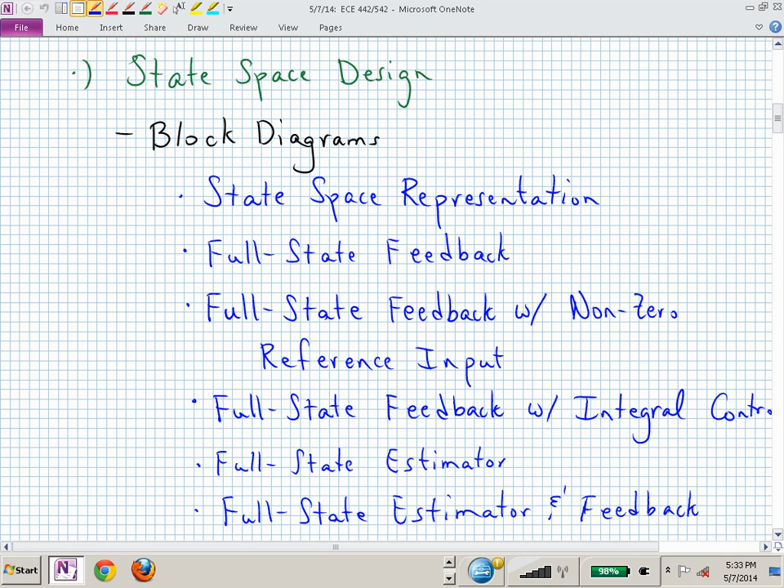Today, a picture is worth how many words? 5? I know this is a discrete class, but 5 is a little low. Don't they say 1,000? A picture is worth 1,000 words. I'm going to give you many thousands of words in the first part of the lecture.

All of these blue dots are going to be pictures. I want to play on your visual conception of what we're talking about when we talk about state space design. We'll look at state space design first by reminding ourselves what the state space representation looks like as a block diagram, and then we'll start building on top of that. If you like to build things, if you're a hands-on person, now is the chance to draw those builds in the state space design approach.

We'll look at state space feedback, and full state feedback with non-zero reference input. That's all on homework 8. Then we will move into integral control, which connects this PID control concept, or at least the integral part of the PID, to state space design approaches.

And why do we like integral control? Just as a question for your final conceptual understanding, what's so good, or why do we like integral control? Or do we like integral control?

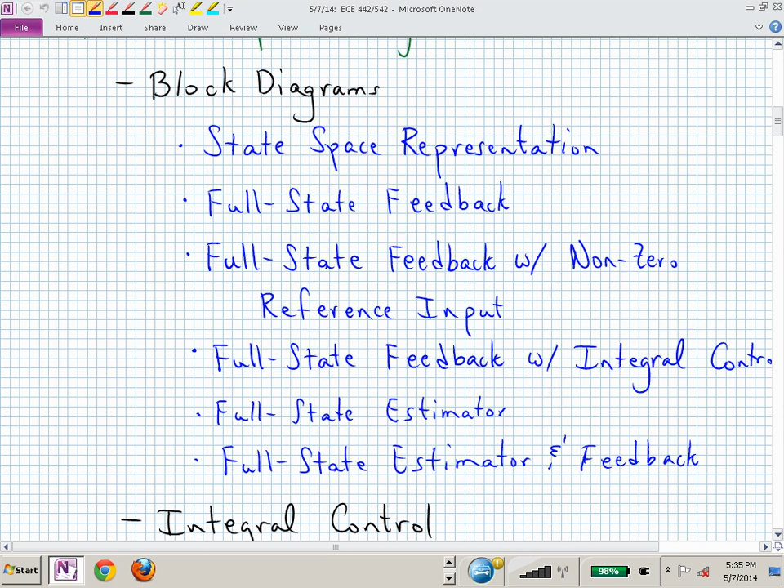It helps us with our steady state error or our steady state accuracy. But it does possibly have to be traded off with transient performance, because it now puts another pole right on the stability boundary, and that may negatively impact our transient performance. So we always have to keep that in mind when we're dealing with integral control.

All of those topics have assumed that we have access to every one of the state variables in our state vector. If we had 10 components in our state vector, then we're assuming we can measure all 10 of those. Maybe it's 2 positions, a couple of voltages, some currents, some temperatures. All of those are, let's say, state variable components.

We're assuming we have access to those in this state variable design approach, until the last two. Now we're saying, well, if we don't have access to those, is there some workaround? And the workaround is to actually build an estimator. This is getting us towards something called a Kalman filter. Have you ever heard of a Kalman filter? If you haven't, then if somebody starts talking about a Kalman filter, you'll go, I've heard about that, I kind of understand what might be happening. We won't talk about a Kalman filter per se, but it will get us there, or start to get us in that direction.

So when I was your age... well, I won't tell stories.

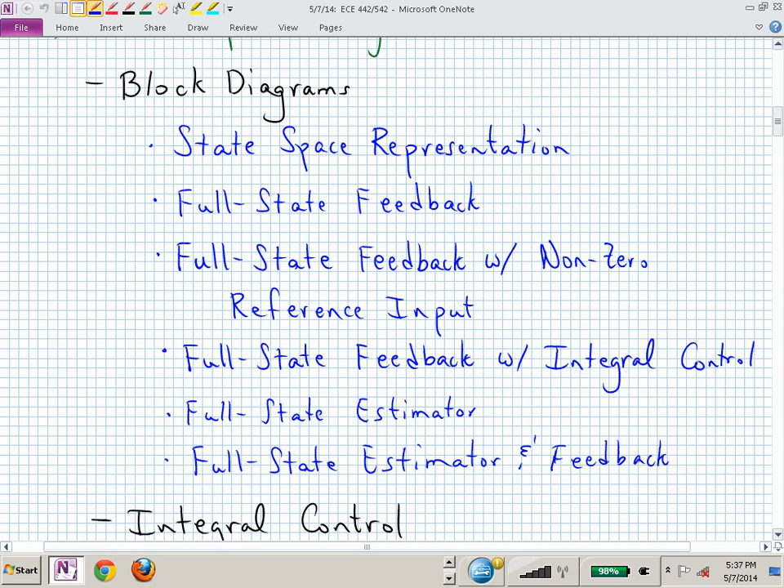We'll look at how, now that we've built this estimator that estimates all state variables, all 10 components of our state vector, maybe from just one measurement, we'll use that instead of the actual state vector, since we don't have access to it. We'll feed back those estimated states—that's the last bulleted item in blue underneath our block diagrams.

With respect to integral control, we will derive the augmented system matrices. That concept of augmenting some dynamics with others is a very powerful concept, and if you can understand it for integral control, it will make sense in other scenarios.

Once we've built this system—and we'll build it directly from the block diagram, that's the importance of the block diagram—we'll discuss how to identify the integrator gain and how to pull off the state vector feedback gain from the augmented set of matrices. Augmented just means we're adding on to the original system dynamics, building up our system matrix and input matrix, increasing their dimensions.

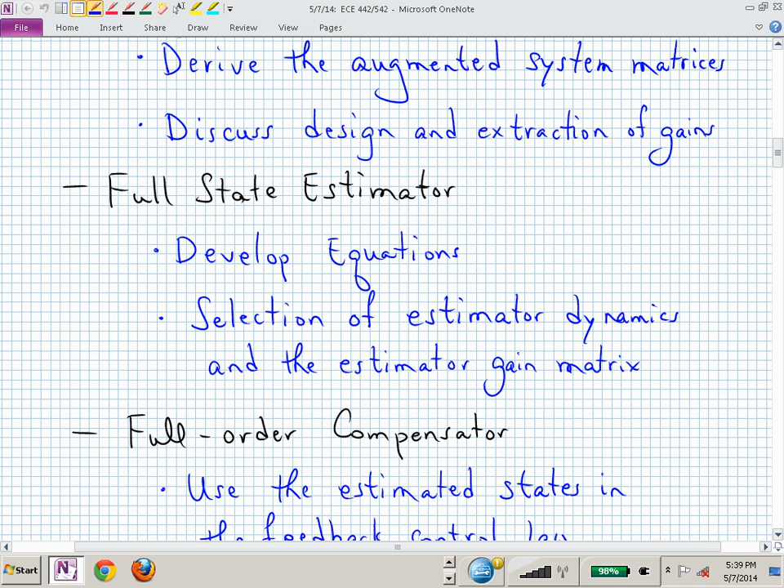We actually want the estimator to converge quicker than our system dynamics. Meaning, if we're applying an estimated position value as if it were the actual position, and it's having a hard time keeping up with the actual position, we're out of luck. So we want our estimated values to converge quickly to where we want them, and then it makes sense to use those as if they are the actual variables. That's the idea.

Then we talk about using the full state feedback gain matrix we've learned to design, with the estimated states. Putting that together gives us a way to design controllers by simply turning the crank—we don't have to scratch our heads about where to put poles and zeros with root locus, when it's not working for us. In the state space approach, we can pick closed loop pole locations, find our K, then go up the alphabet and find an L for our estimator gain, and put it all together to get a compensator.

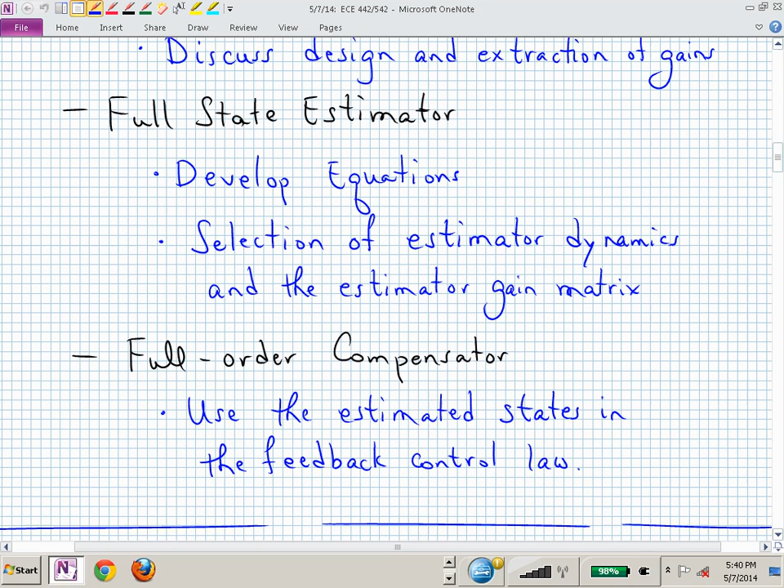That will work, and maybe it will give us ideas or hints as to how we might go back and build a generic or general controller in the Z-plane approach that could be of lower dimension than this estimator-based one.

Final exam info—I'll go through this quickly. It's comprehensive. There will be 15 questions distributed across the entire semester. But since the last material is sort of cumulative, I could give one problem with several parts, which might reduce my grading.

Meaning, if you don't even know how to start, there's 5 questions I don't have to grade. But the later material does depend on earlier material, so in that sense it might look weighted toward the end, but that's because you're using all the foundational material from before. The idea is that it will be distributed across the entire semester, and I've put together a topic list for the final exam, but that only includes material since exam number 3.

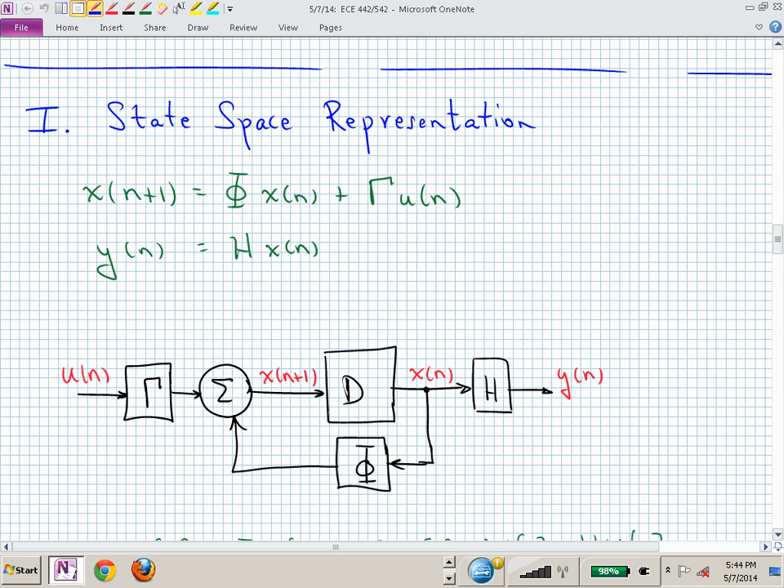But this is now the picture, and you should be able to, from this picture, write down this set of dynamic equations and the output equation. You should be able to go from this state space representation into a block diagram by simply connecting up summing junctions, matrix blocks for gains, and the delay block that processes or delays each of those state vector components. That's the state space representation.

And this should just be review — you can now z-transform the state space. If you're looking to find the transfer function, you don't need to worry about initial conditions, and you can find the transfer function g of z from that set of difference equations represented by your state space representation.

What are we doing in a real world setting? Yes, this is a regulator. We're really only worried about damping out initial conditions or disturbances in our state vector. We're not really saying we're interested in commanding our output to go somewhere — we're probably trying to regulate that y to 0. It's a regulation problem, and we're able to regulate it by shaping the dynamics.

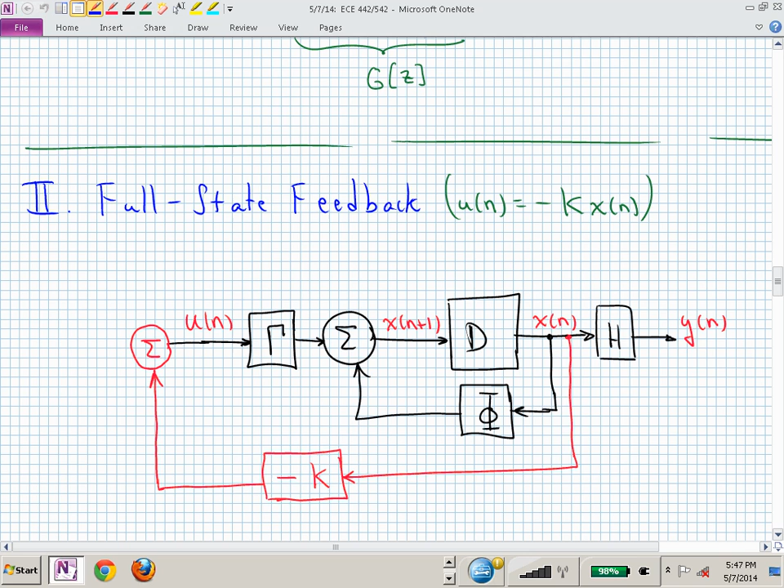And when I say shaping the dynamics, you should be thinking closed loop what? Closed loop eigenvalues of your closed loop system matrix, which is phi sub c. Some of you came up after class and said, didn't you forget some c subscripts? And I did — so in the video they're not there, but after class I added those in during the latter part of that discussion. I was just getting quick and writing phi, but it really should have been capital Phi sub c, the closed loop system matrix, which in this case is phi minus gamma k. That's the closed loop system matrix, if you combine all of those together.

So that if you inject a reference signal of 1 meter, your output goes to 1 meter. It doesn't go to 25 meters. You've adjusted this N1 to make that adjustment happen automatically.

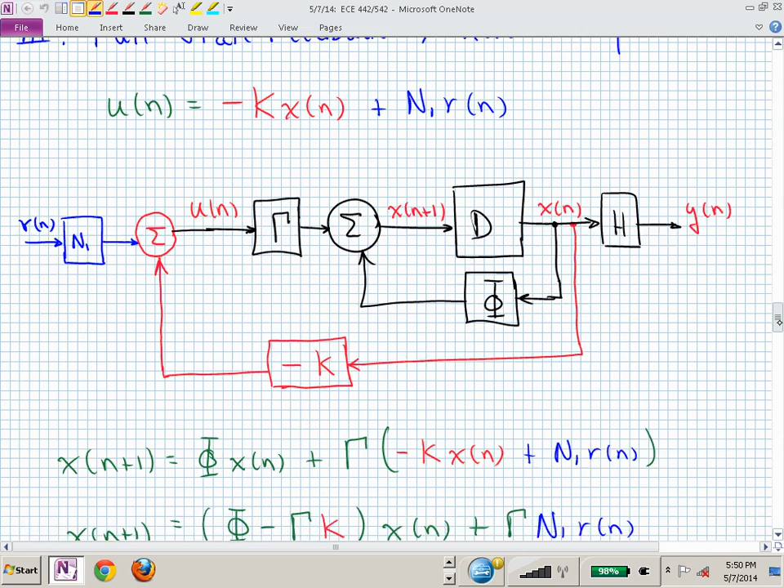So you're sitting here going, what? If you go back to yesterday's class when we had a second order system, then you would know that you have two state variable components. And if we're told that the input, we only have one input, that's going to tell us what K is dimensionally. K is trying to transfer the state vector into the input, linearly combining our state vector. So if we have two state components in our x of n vector, position and velocity, and we only have one input, then K is going to be a 1 by 2 matrix, a row vector.

What's n sub 1 if we have one input? It's a matrix, but it could be a 1 by 1 matrix, which you think of as a scalar. And that's typically what we will be using in this class.

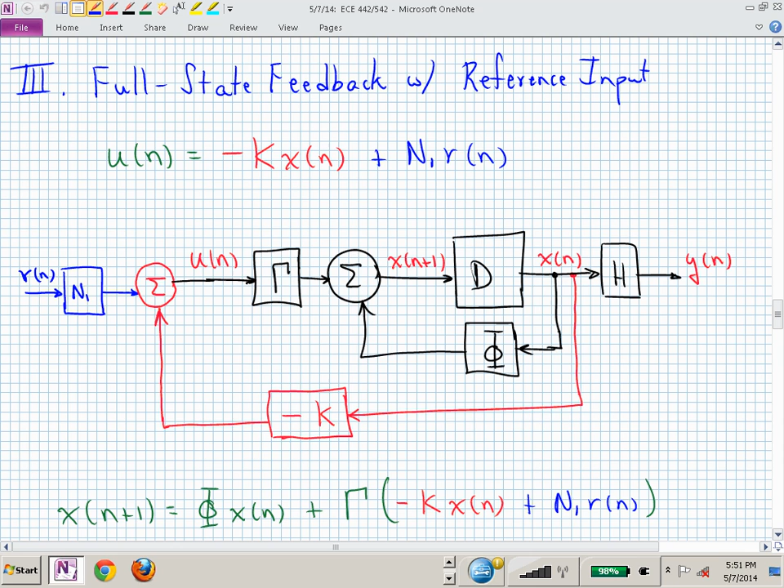Now applying that U of n, you could also find the dimension of K by saying, wait a minute, gamma K, that product better be compatible dimensionally with phi. Phi was our system matrix, that's 2 by 2. And if gamma was 2 by 1, then we need to multiply gamma by a 1 by 2 to expand that product to be a 2 by 2 matrix so that it's compatible with phi.

Another way of thinking about phi, we could call that phi sub c, and this is what you're using in homework number 1 or number 8. You're looking at this transfer function T sub c of z and adjusting n sub 1 to typically create a DC gain between the reference input and the output of 1. And if we have a single input, single output system, that H, we're replacing Z with 1 because we're interested in the DC behavior.

I minus phi sub c inverse, gamma, that's simply going to all collapse down into one number, a scalar, a 1 by 1 matrix, and that we can divide underneath. We don't have to worry about matrix inversion for a single input, single output. Questions on this?

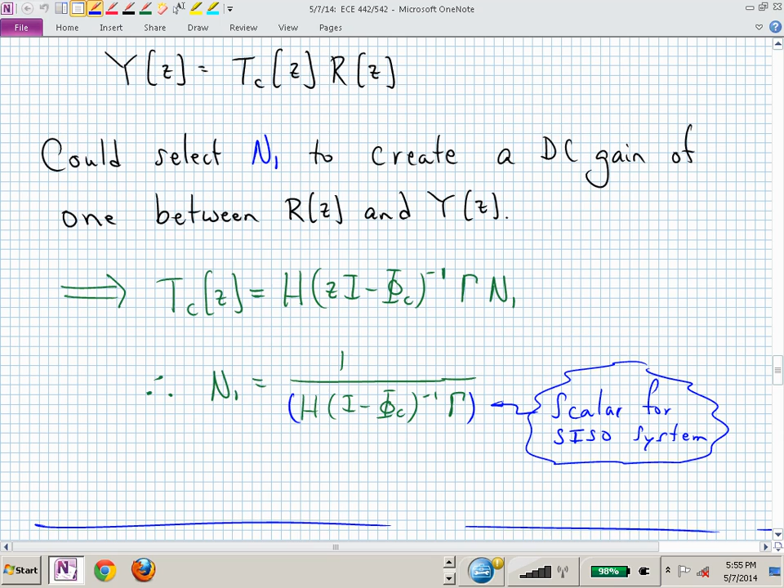Uh-oh. Wow. All right, bear with me, let's see if I can.

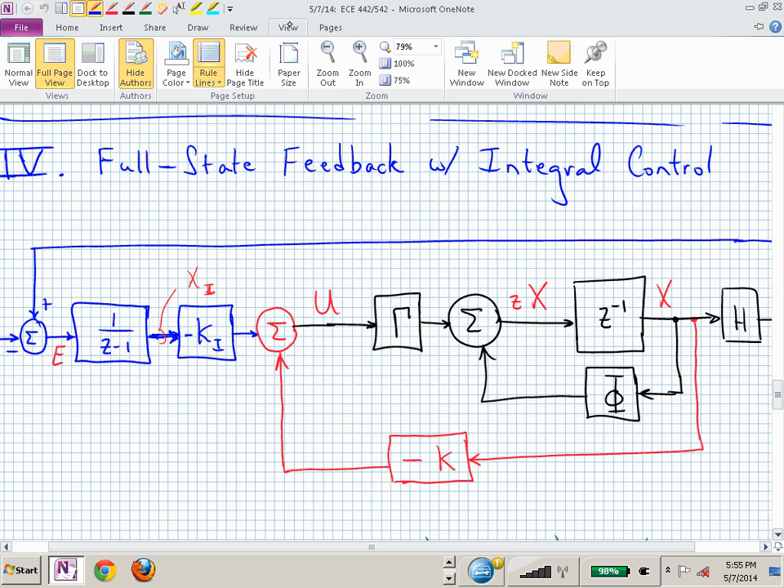Now we're adding integral control because maybe we don't know all of the elements in phi accurately enough, or the elements in gamma accurately enough. Gamma is how we inject information into our system.

And we liked integral control because that allowed us to drive our error to 0 if the whole system is stable. If we can guarantee the whole system is stable, then that error signal is going to be driven to 0. If our error signal is 0, what does that tell us about our output?

It matches the input, doesn't it? And notice how I've labeled this. Maybe that's a little different than what we have, but I needed to do that because I'm introducing a negative sign inside here to be consistent with the negative here in the full state feedback, so I didn't want a double negative on my output as it's coming through the system.

This is simply an integrator block, this 1 over z minus 1. K sub I, the I is for integral, that's our integrator gain, and that's just a scalar. K is whatever dimension it needs to be to manipulate the state vector into the input.

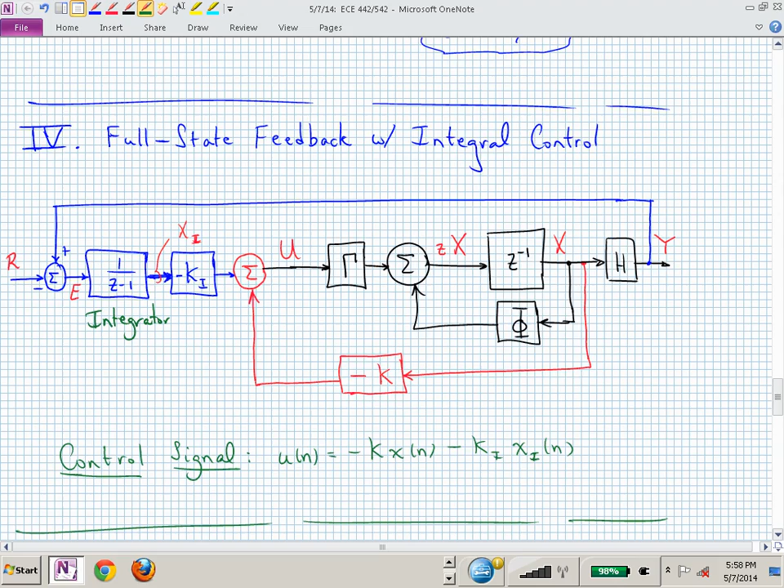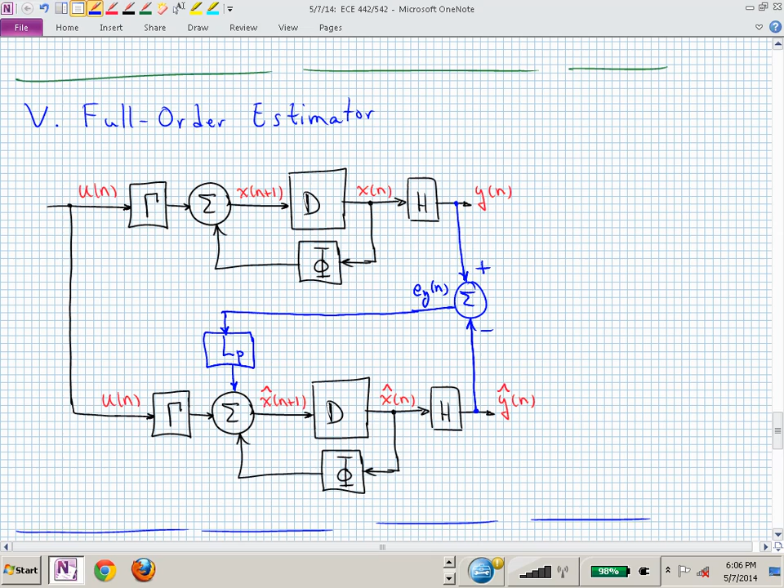We've talked about a system being controllable. This one would need to be observable. It's a dual concept, meaning you need to be able to see all of your state vector's components through the output y. And then you can use L sub p to adjust the dynamics at will. That's the idea.

Here's the same thing as before, almost. Now we're going to simply—I need to put some party hats on these, don't I? Because we know these aren't the same. Even though our phis and h's and gammas may be identical, they may not be the same because maybe our system actually started at a different location than our estimated version did.

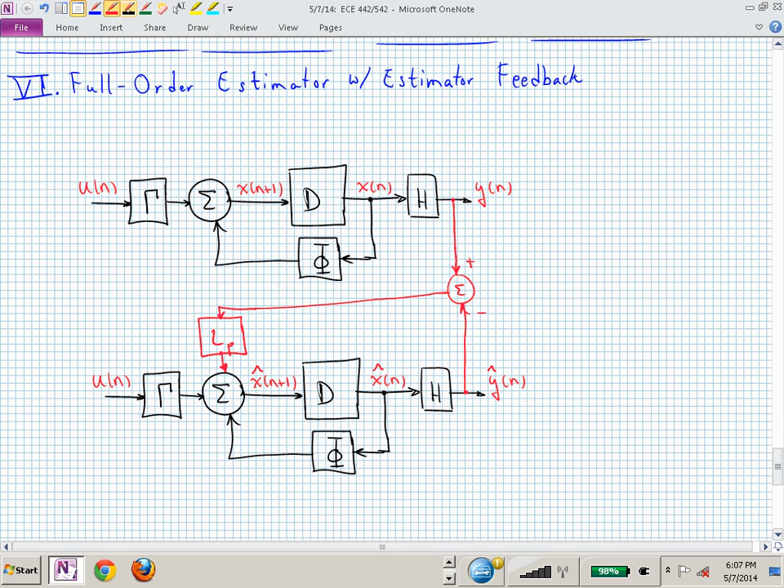We'll use that error signal, but now to control this, what we're going to do is measure, or have access to, x hat. We'll scale that with our full state feedback gain matrix that we've been using all along, and that will now drive not only our estimator but also our true system. The combination will control this true system in a way that we want it to behave. That's the idea.

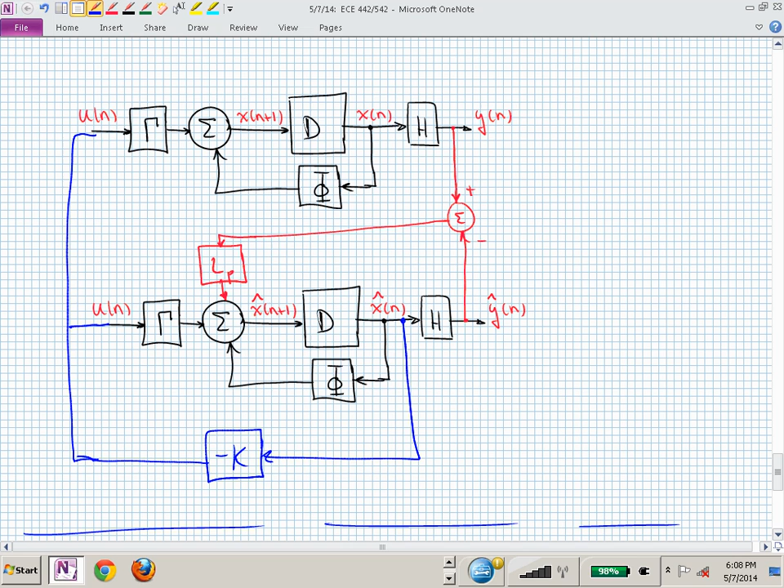All right, now let's quit looking at the picture book. Whoops, went the wrong direction.

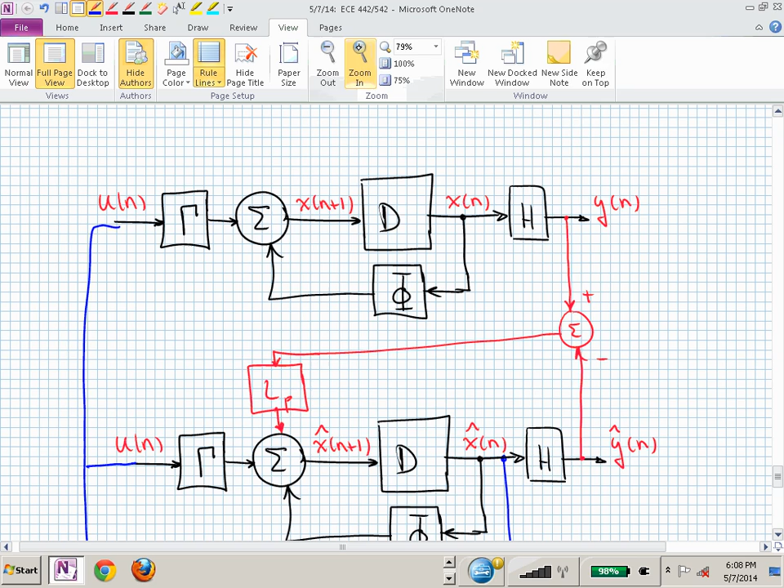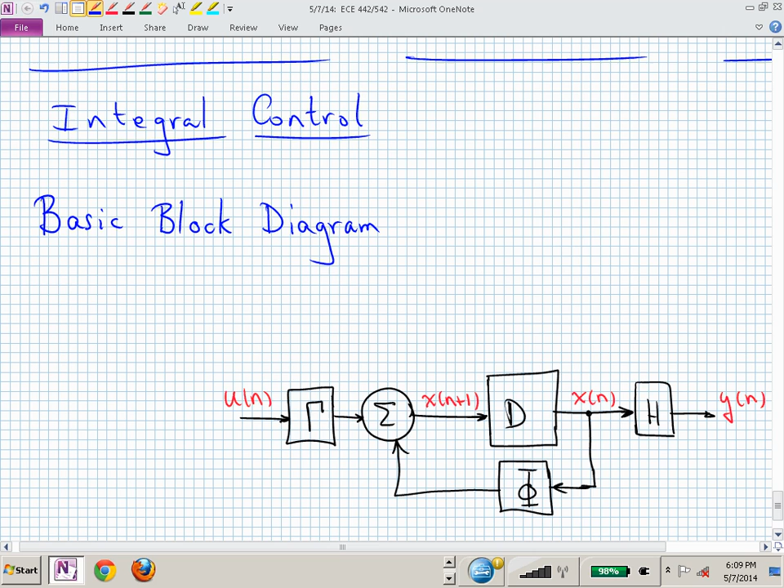And let's talk about integral control. Maybe I didn't go the wrong direction. Here's integral control. Not quite, is it? Right now I have just the original system dynamics, and we want to introduce an integrator into this.

An integrator is trying to integrate away the error between our output signal y and our reference signal r. So now, and maybe I don't really like this because I'm going to be mixing time domain and frequency domain, so I'm going to get rid of the time domain arguments here, and say that this is now z times x, and this is x. Let's say this is y and u, but in the transform domain.

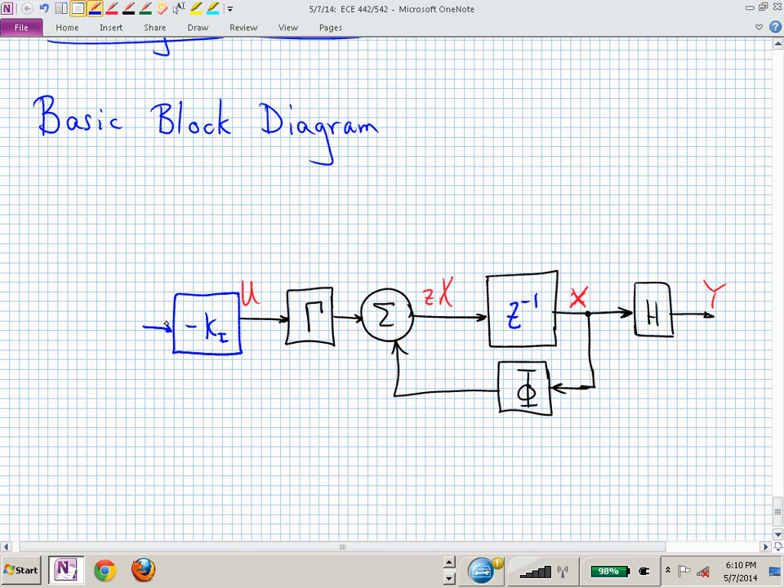I want that to be a bank of delays in the transform domain, because I want to build up my integrator in the frequency domain, or in the z domain. 1 over z minus 1 is an integrator. That's going to be my u. I knew I was running out of space, so I'm going to have to squeeze something in here.

There's our u. That's supposed to be a summing junction, and what we're going to do now is go back to assuming we have access to the full state. We're going to scale that, and this may not be the same k, so I'm going to give it a hat like before. This will go here, but that's not going to give us all that we wanted, because maybe we have inaccuracies in what phi actually is, or what gamma actually is.

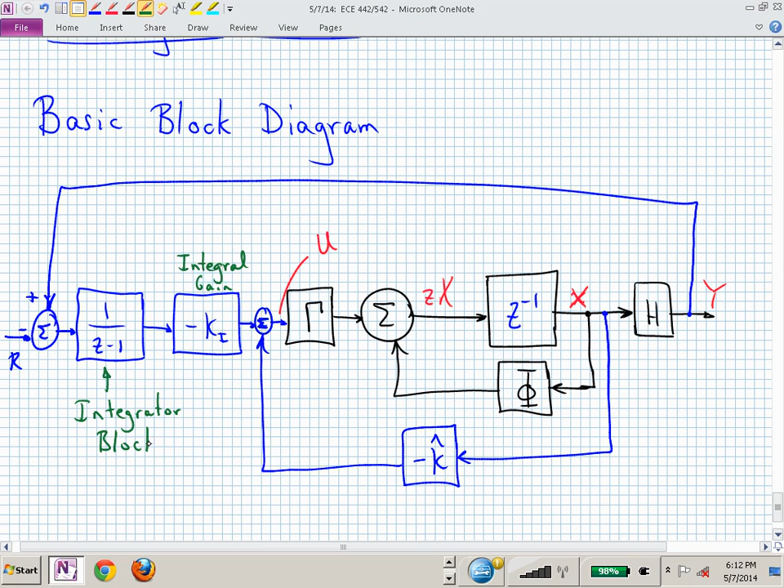For that reason, we want to compare the reference signal with a negative sign with our output with a positive sign. This is our integral gain, and this is our integrator block. And this is our full state feedback gain matrix.

What we want to do is figure out how to model this, and if we can model it, can we create a strategy for figuring out how to pick k hat and k sub I. But is this block diagram okay? Do you see, or do you have a feel for what's going on here? That's what I hope you're starting to do in this class. At this point, I hope the block diagram just screams at you, oh, that's just my state space representation, my dynamics, and my output equation.

Yes? So if your integral gain was not 1, would you need to scale your output from that gain as 1 over your integral gain? So your integral gain, k sub I, we don't know what that's going to be. But we are making our output path be unity, meaning we're comparing the output y to the reference r. We're not scaling the output y when we're comparing it to our reference.

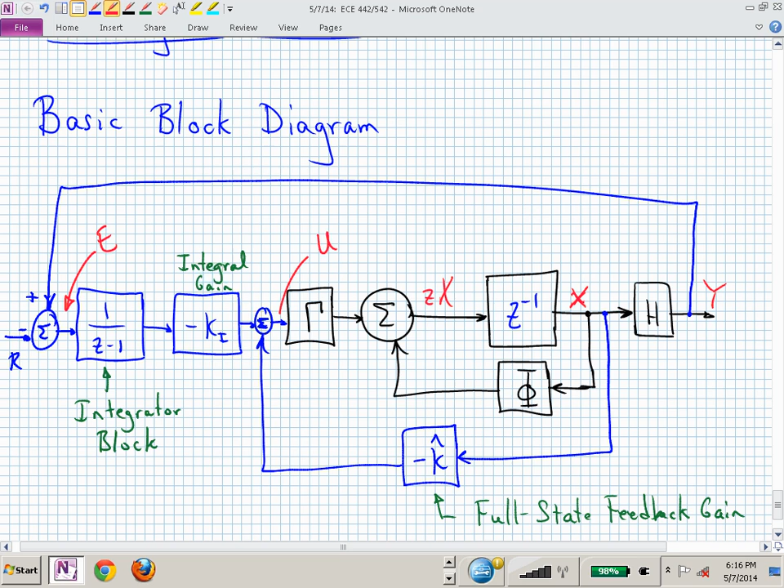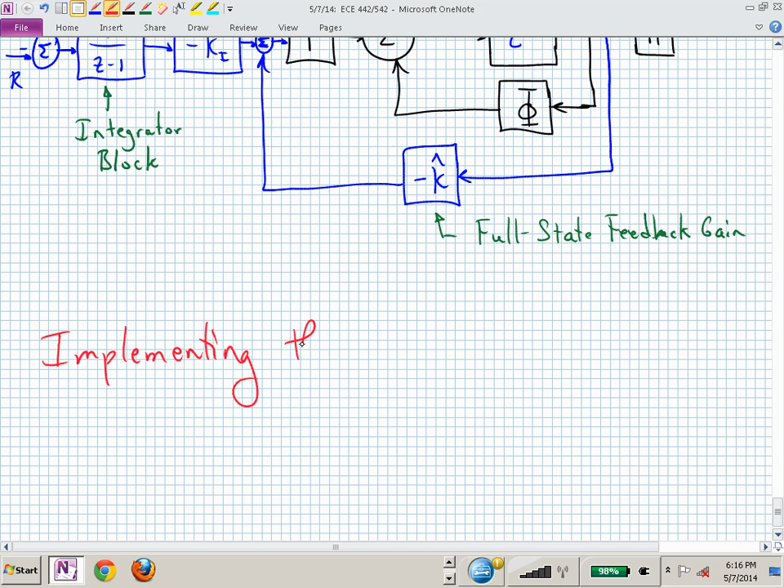What we want to do now is, let's just say we are going to do an implementation of this integral control structure.

Or another way of finding that is we're finding Elmo. Oh, I'm not Elmo. Who do you find? Waldo. Finding Waldo. Who's Elmo? Nemo, wasn't it? I don't know, I don't go to movies. I don't watch movies, obviously. So now it's finding Waldo, or where's Waldo? It's finding Nemo, isn't it? All right, where's Waldo? I don't know where Waldo is. We don't need to worry about Waldo.

We need to find k sub I and k hat. That's what I want to be able to do.

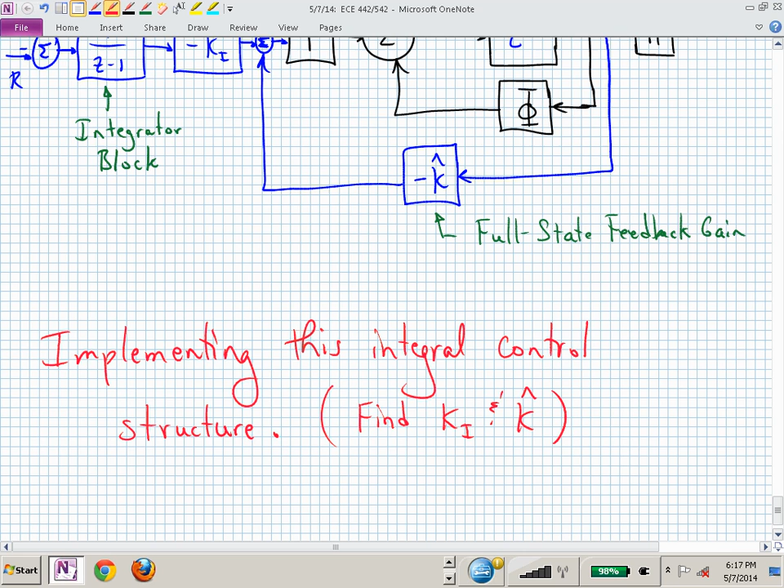Let's start with trying to figure out what's going on here. Let's say this signal is x sub I, the state vector component that's the output of that integrator block, and the input to that integrator block is E. This is just a final exam review problem, as easy as it gets.

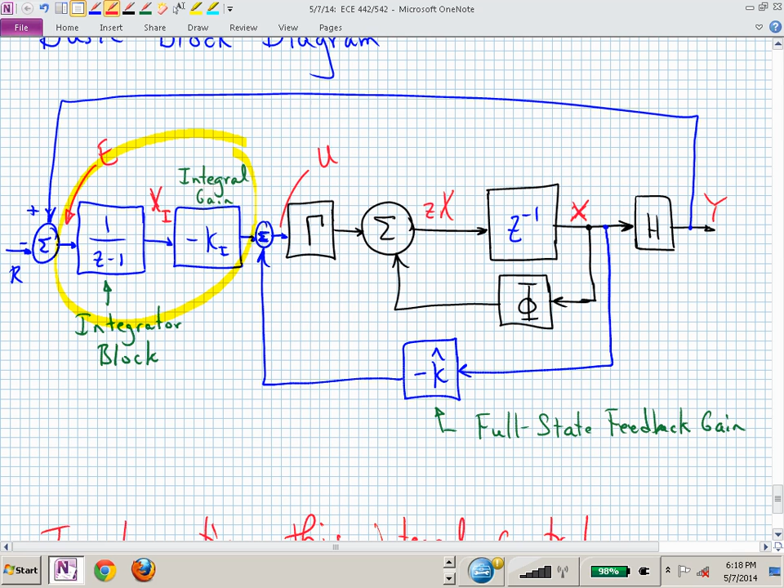So let's now look at the dynamics of what we've just drawn via a block diagram. This is prime material for sketching on napkins. If you're in an interview and somebody says, what did you do in class tonight? You can say, I was designing integral controllers. Can you explain that to me? Sure, where's a napkin? So you pull out a napkin and start writing down the dynamics, and you impress your interviewer. Let's look at the dynamics, and in particular the integral term.

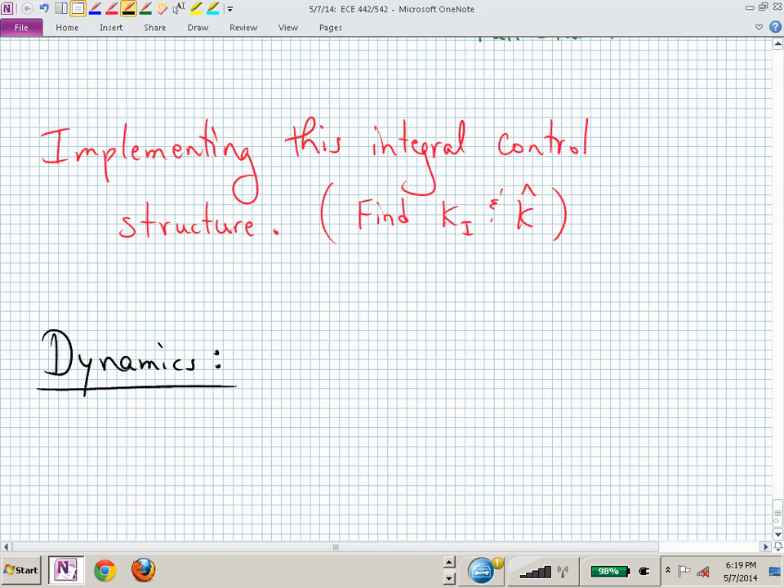This helps you review for the final exam, which is Friday. That's our commercial. The exam is Friday at 6, right? If you come here 48 hours from now, you're going to miss 20 minutes of your exam. Don't do that, because it's a long exam. So get plenty of rest between now and then, but not so much that you sleep through the final.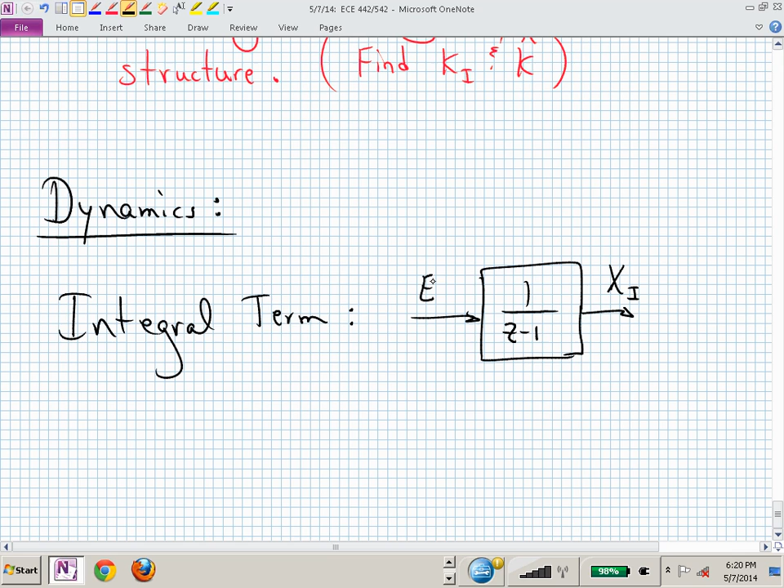1 over z minus 1, that's the block, that's the integrator block. Here's the output, x sub I, and here's the input, E. Now if I said derive the difference equation associated with that, you better be able to do it on the exam, right? Probably won't get any easier than this on the final.

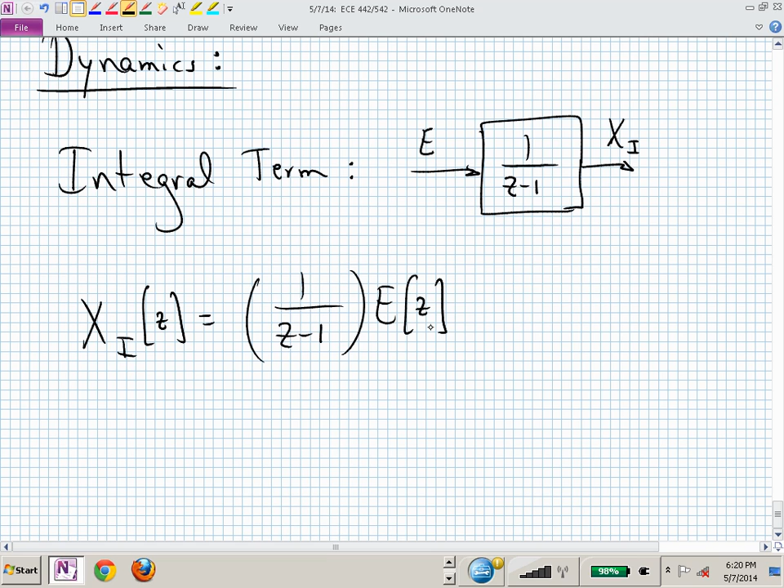So you get that picture and you say, that's x sub I in the z domain. That's the output, and that's equal to 1 over z minus 1 times e of z. See, this is so easy, you're yawning. Or I start talking about sleep, and I've lost half of my audience. I'd already lost the first half. Now I'm all alone. I can do whatever I want, can't I? You guys won't be any wiser, especially those at home.

Now what do I want? A difference equation, because I want to augment my earlier dynamics, which are x of n plus 1 equal phi x of n plus gamma u of n. I want to augment that with what this produces. So what's the difference equation look like for this? Let me just cross multiply, and I have z minus 1 x sub I of z is equal to e of z. That should be straightforward.

Now I have z x sub I of z minus x sub I of z equaling e of z. Shouldn't be any questions with that. Are there any questions with that? That should be clear. You should be comfortable with that. If you're not, please get comfortable with that because it's not going to get any easier than that for the final.

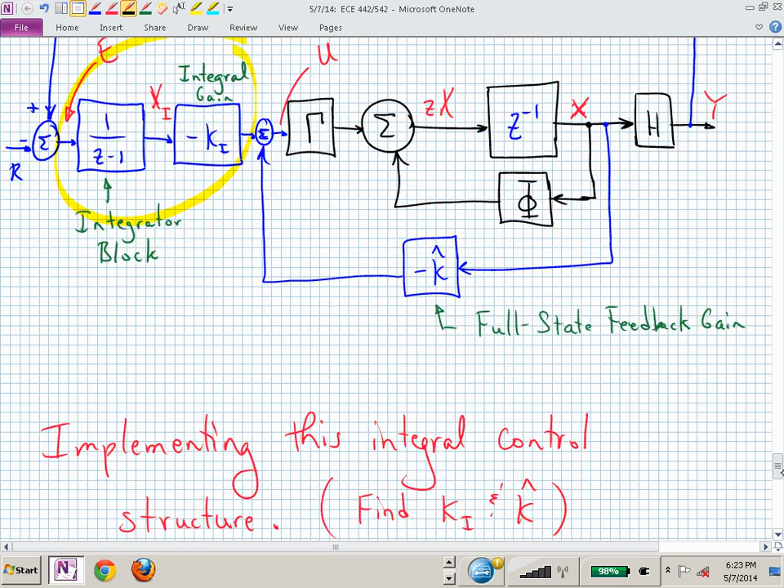But what's E? What was E in our block diagram? Again, we're just going from pictures, our napkin. E is made up of the reference with a minus sign on the reference and the output Y with a plus sign. That's how we defined E in this block diagram. Different maybe than what we've done in the past.

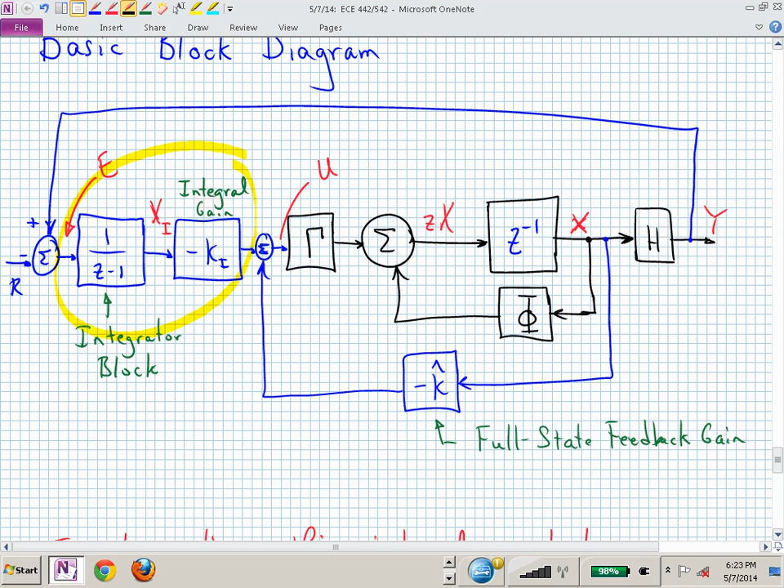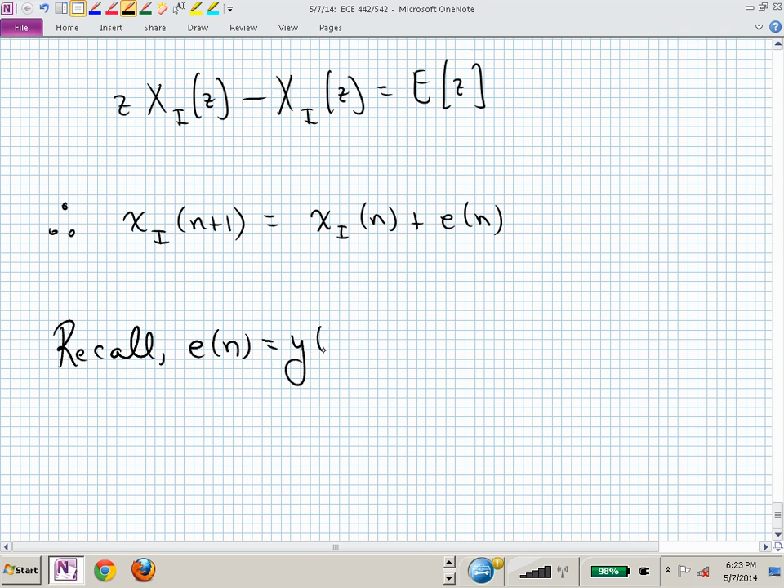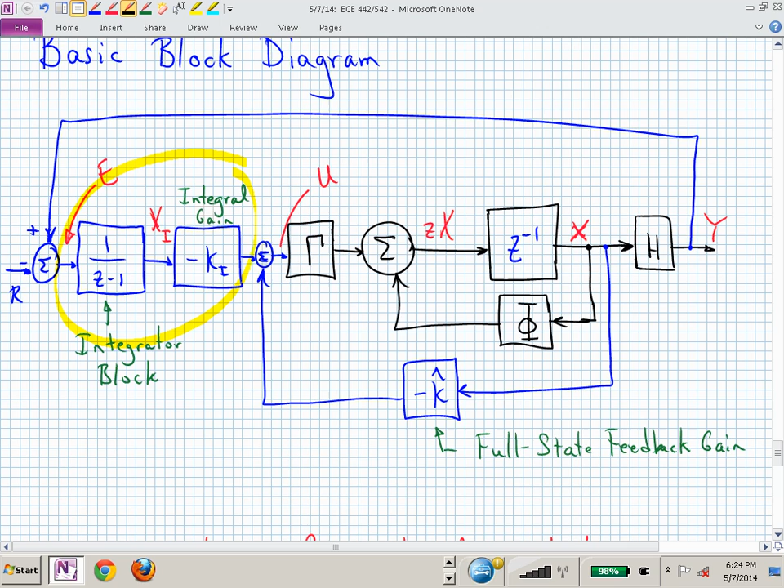So from the block diagram, E of n was actually Y of n minus R of n. But what's Y of n in terms of the state vector? If we go back here, Y is just the state vector scaled by H. H is somehow measuring all the state vectors and combining those into one number if we have one output into our output Y. So that E is actually H x of n minus r of n.

And if we put that error into the integrator formula, then we have x sub I of n plus 1 is equal to x sub I of n plus h times x of n minus r of n.

Questions on that? This is now the dynamic behavior that we need to augment on top of the earlier dynamics from our system, x of n plus 1, how it behaves. And this is just an integrator, integrating the error signal, but now we've described the error signal in terms of our state vector and the reference input R.

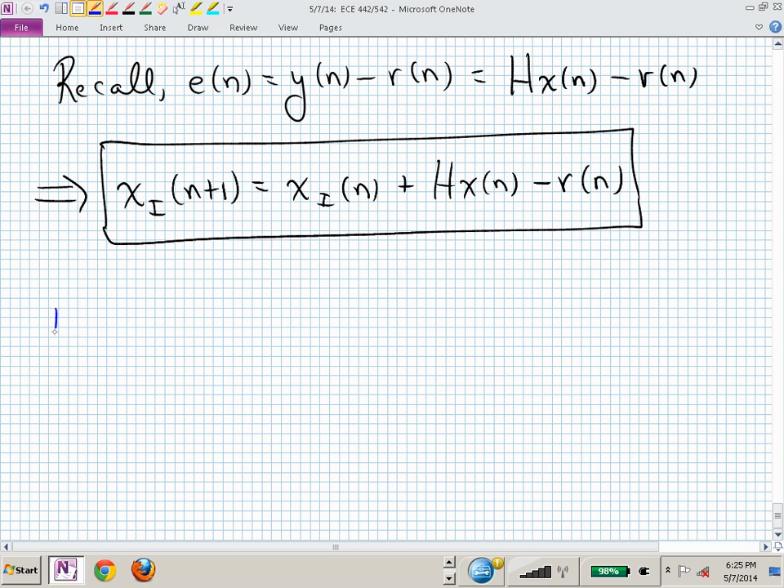Let's now increase our matrices. Let's now augment the integral dynamics, which is what I've just highlighted in the rectangular box, onto the original dynamics. By that, I simply mean I'm stacking another state vector component onto the original state vector.

If I had 10 components in X, now I'm just going to put X sub I on the top of it. And now my state vector, my augmented state vector, is 11 tall. Is that clear?

I'm now going to have X sub I of n plus 1 is equal to X sub I of n plus h times x of n minus r of n, and I have x of n plus 1 equaling phi x of n plus gamma u of n.

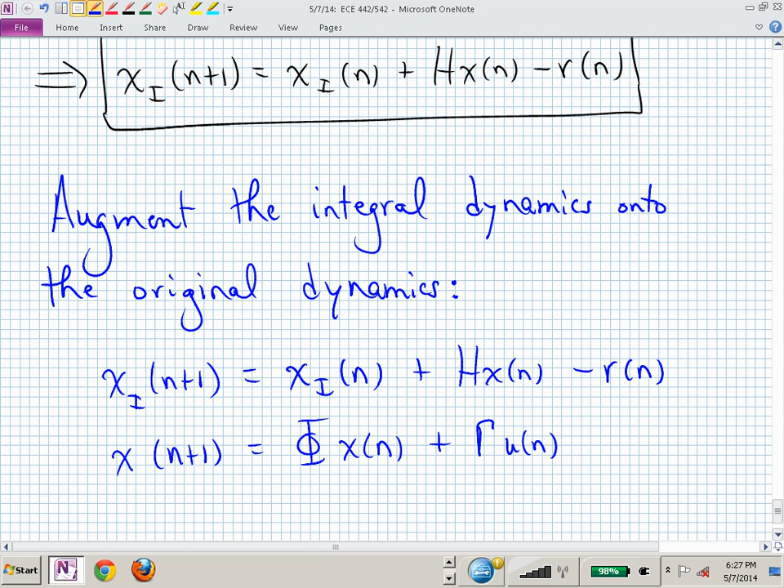I apologize, somebody came up after Monday's class and was commenting on my penmanship, or the lack thereof, and they said your gamma looks like your R. And I thought, ooh, really? So it kind of does, but I hope you know what is what, okay? I'm not offended by that. I didn't understand the question for the longest time, but then I got it. So the gamma, that's a Greek letter, and this is an English R. They're completely different. Okay? So please, I hope that doesn't confuse you.

Now, what do we do? Well, let's now build this into a matrix representation. We just said that we are going to make x sub I n plus 1 stacked on top of x. And x sub I is 1 in height. X, we haven't said, it might be 10 tall, it might be 4 tall, it might be 2 tall, maybe it's a 1 by 1. Maybe this augmented vector is just a 2 by 1 vector.

But now what we want to do is write that in terms of x sub I of n and x of n plus something. Uh-oh, I'm going to have to tape some more pages on, or width on, but that's easy for me to do. Plus, that's R. Gosh, now that that was pointed out to me, it does look like a gamma. But that's supposed to be a little lowercase r.

Is that clear? So now I need to make all of that, or the top two equations, fit into these augmented dynamics. Is it clear what's happening? If x, let's just say x is 10 tall, then how big is this empty system matrix? And let's say I only have the one integrator. How big is that empty system matrix dimensionally?

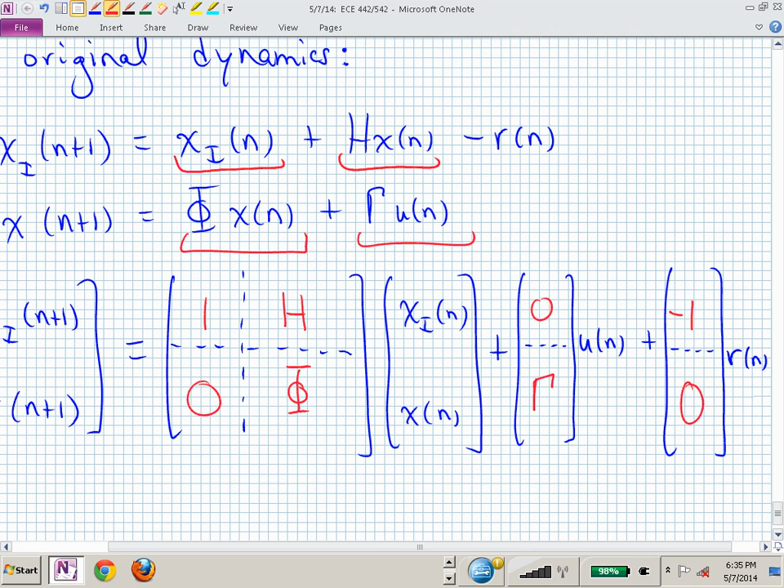That's now our new, you could say that this is now a new system matrix. I'm partied out, so I'm just going to give it a flat hat. Okay? Phi bar. This is now gamma bar. And I haven't even decided to give this one a name, the second input vector or matrix. But now, if we can play with phi bar and gamma bar just like we played with phi and gamma before, it's just now they've grown a little bit. They're a little bigger, and they have specific structure to them.

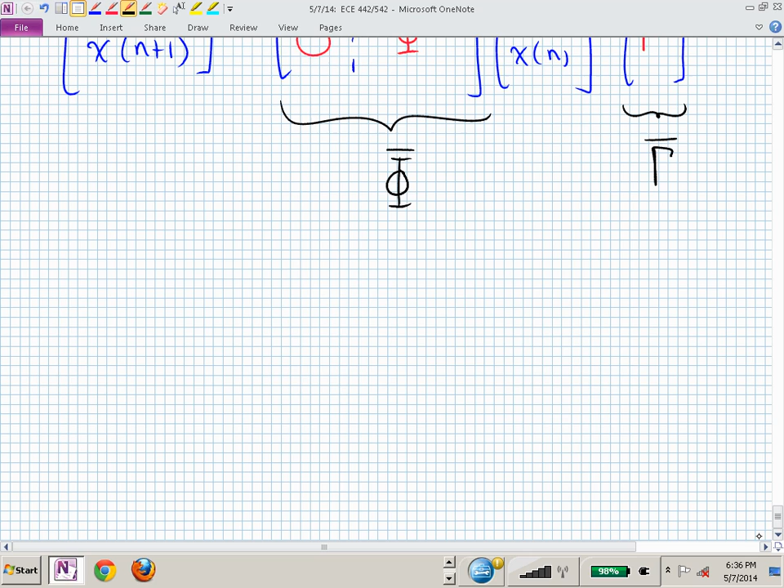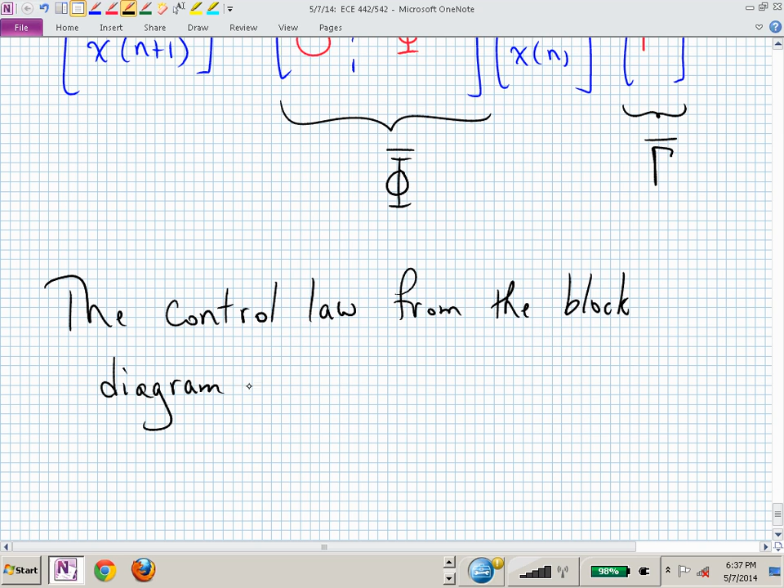What's our control law look like? We want the control law to be in terms of our state vector, because we want to apply full state feedback again. So now the control law we can find directly from the block diagram. U of n, if we go up to our block diagram, do you see how beneficial this block diagram was?

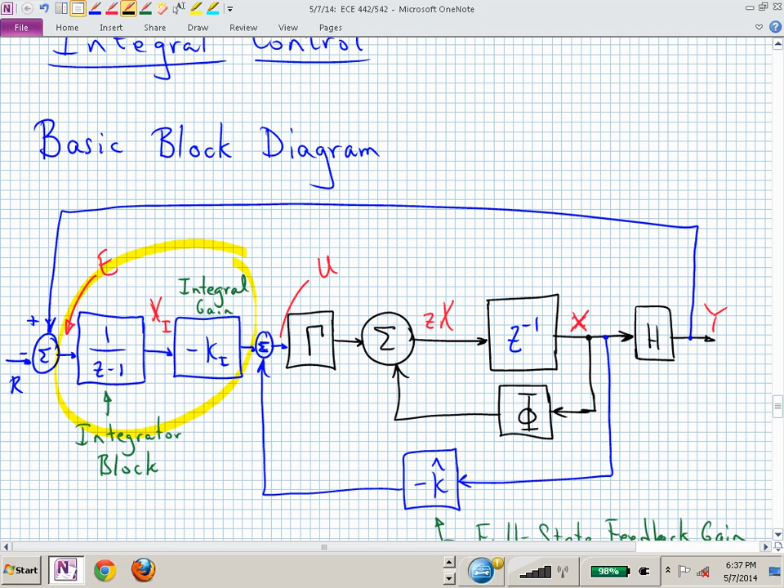U of n, which is what this will be in the time domain, is just minus k sub I x sub I of n. That's one of our state vector components. Minus k hat x of n. That's U of n, directly from the block diagram. So now we know U of n is equal to minus, and we hatted this one. We were still in our party mode. This was minus k hat x of n.

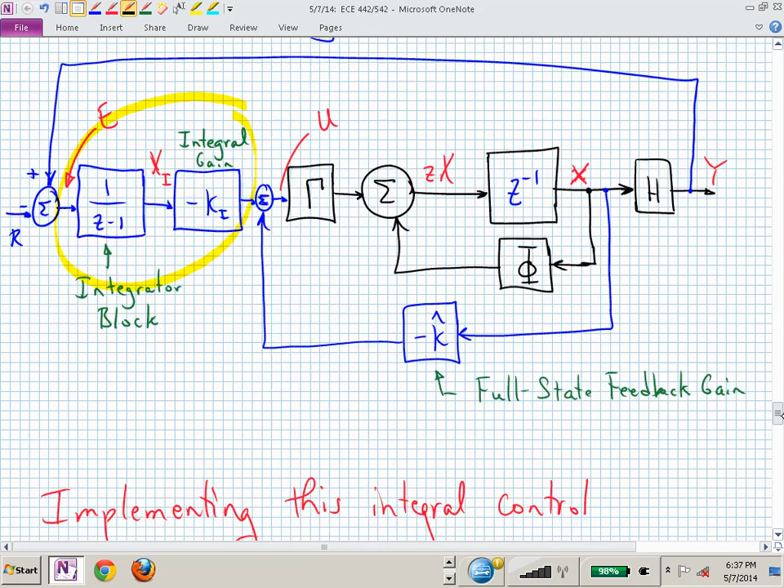Why did I do that? Let me not do that, because I've done my integrator first. So what was the integrator? That was minus k sub I x sub I of n. Minus, now we're back to the party, k hat x of n. That's our U of n.

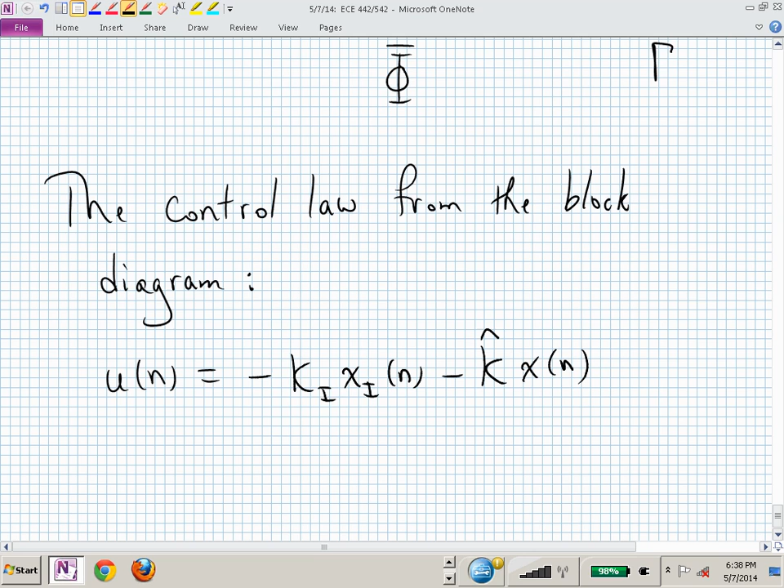But I hope it's clear that we could write that as a minus k sub I, k hat times our new augmented state vector. And we could call this k bar.

And now we're in our full state feedback design strategy. We now need to find or design our k bar. Once we've found k bar, we can partition that k bar. What's k sub I dimensionally if we have one input? How wide is k sub I? Just one, isn't it? So k sub I is a 1 by 1 scalar, and k hat is 1 tall, and it's as wide as our original state vector. It's maybe 10 wide.

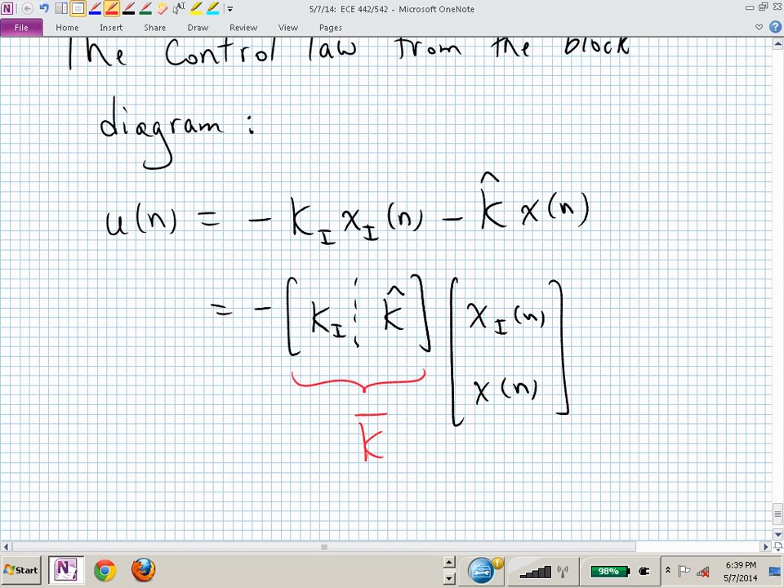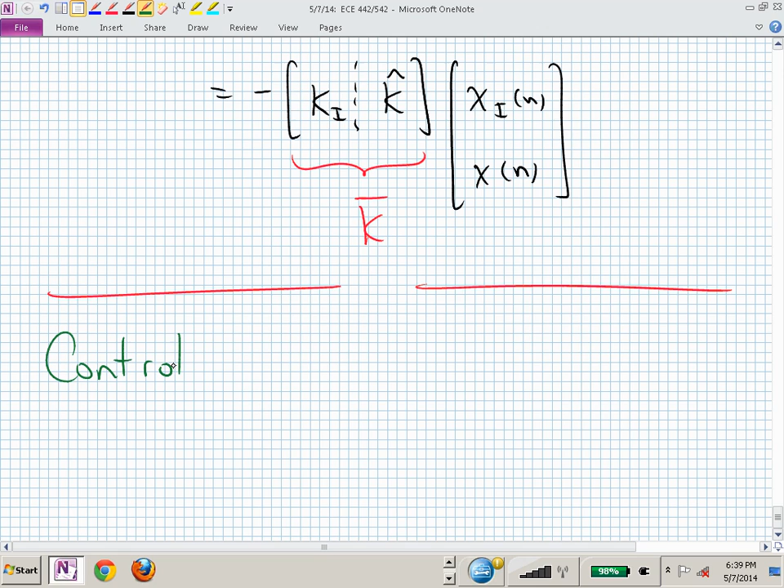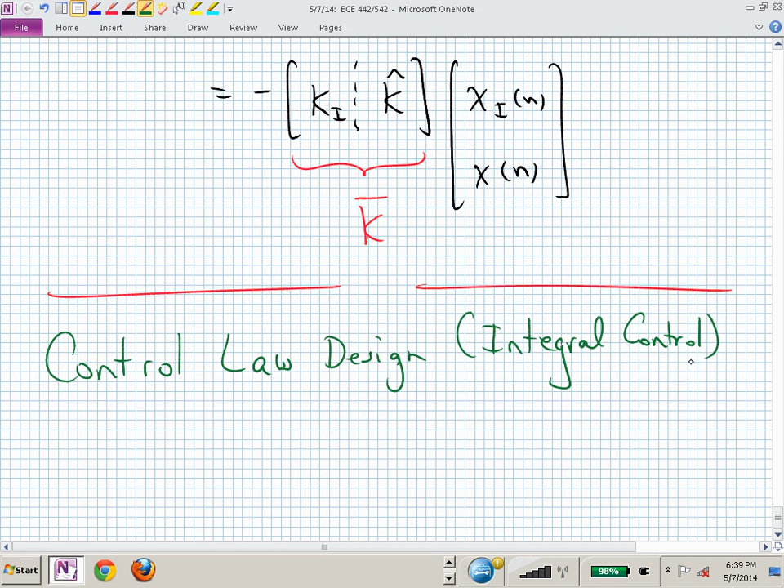Here's the process. From the block diagram, we've extracted all the information we need in our equations, and now we can walk through the control law design when we're implementing integral control with full state feedback. This is how you can design an integral controller to enhance what you were getting with full state feedback.

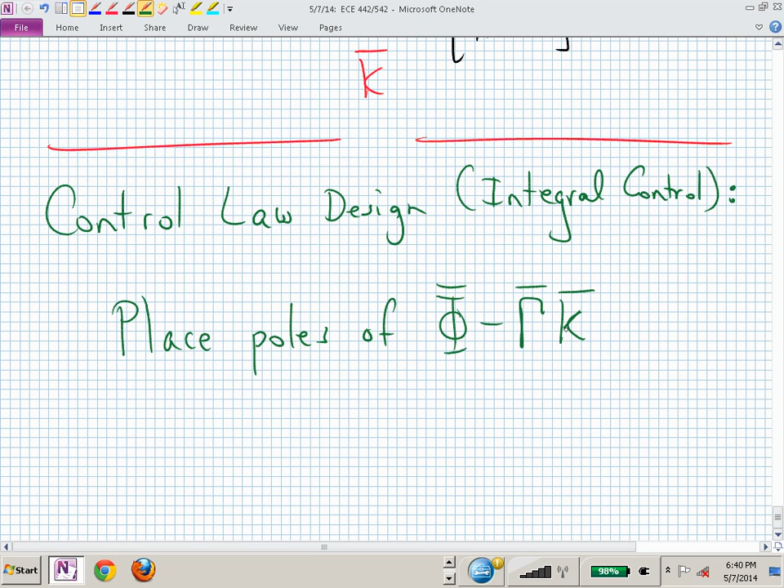What we want to do is place the poles of phi bar minus gamma bar k bar with the choice of k bar. K bar is going to be for a single input. N is now the dimension of my state vector, not the time index n. Is that clear? N is 10 in our example. It's not the time index n in this situation. And this is for a single input, since we have ones floating around.

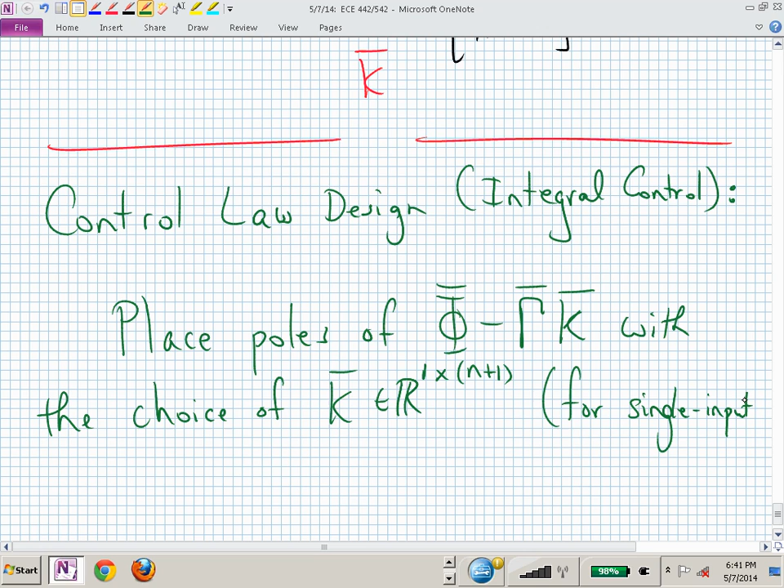Now, is it clear how you build phi bar? You've created phi bar. You need the output matrix, the original system matrix phi, and a 1, and put those in the appropriate location. Now you have phi bar. Gamma bar is easy: 0 on top of gamma, the original input matrix. Now you have a system matrix and an input matrix.

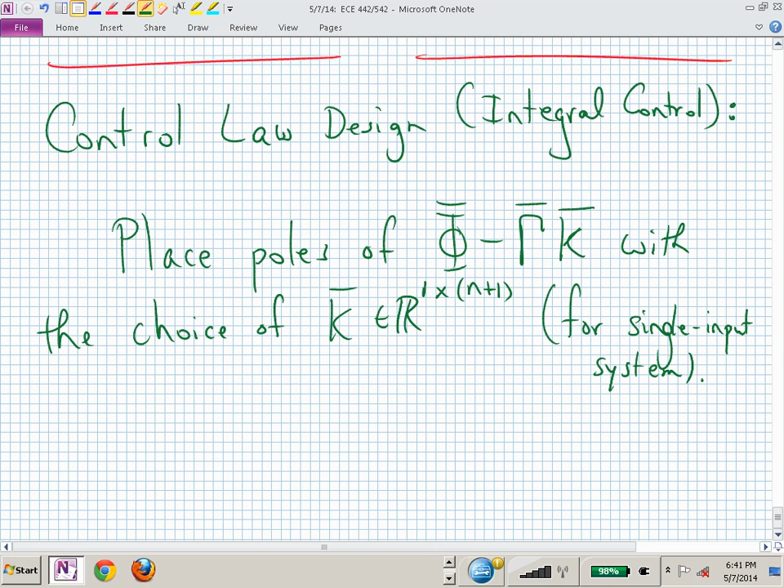You know how to pick k bar. That's what everybody said 10 minutes ago — they can design full state feedback. Once you've found k bar, now you just need to divide it or split it up to identify the integrator gain and the full state feedback gain, and put it into your block diagram, into your system.

So this is really the design process: place the poles of phi bar minus gamma bar k bar with k bar, and once k bar is determined, to place the n plus 1 eigenvalues of phi bar minus gamma bar k bar.

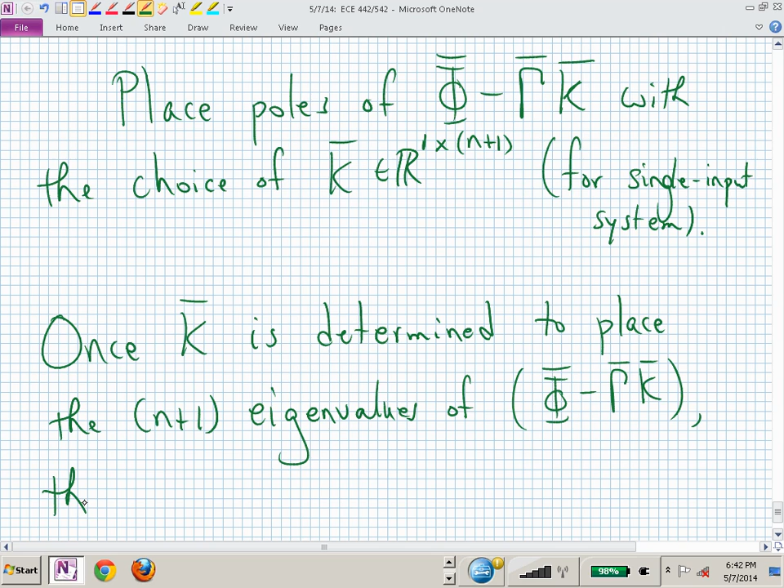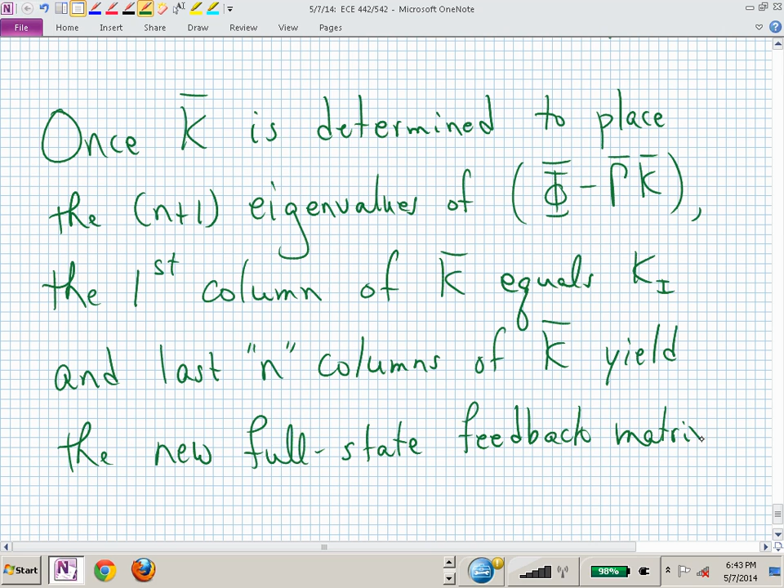The very first column in k bar equals what? K sub I — that's our integrator gain. That equals K sub I. And the remaining n columns of K bar yield the new full state feedback matrix, which we were calling K hat, which was an element of 1 by n.

Remember, K bar was just this K sub I. It was compatibly partitioned with our new state vector, X sub I and X.

If I now give you this on the final, will I not have to grade too much? Yes.

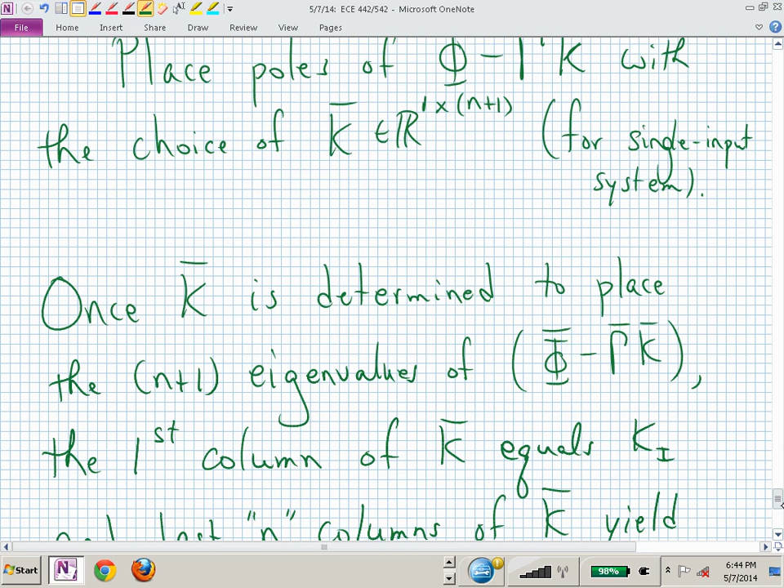So now what we want to do is place the poles of phi bar minus gamma bar k bar. We have to basically throw away our earlier full state feedback gain matrix because now we have a new problem. But we may know exactly where we want those poles to live. What we don't know is where we want our integrator dynamics to be moved into the unit circle. So we now have to add on one more closed loop pole from where we wanted in our, let's say, 10 by 10 original. Now we introduce another one, and we may make it about the same or maybe a little faster, not much faster. We won't want to really tax our system, but we make our additional closed loop pole in the same range as the fastest of our original closed loop poles.

Now we have 11 closed loop poles that we will place with K bar. And this K bar may not be the same as what K was when we had the original 10 by 10. It's going to be different because we now have a different problem, phi bar minus gamma bar, that we're using to control the system.